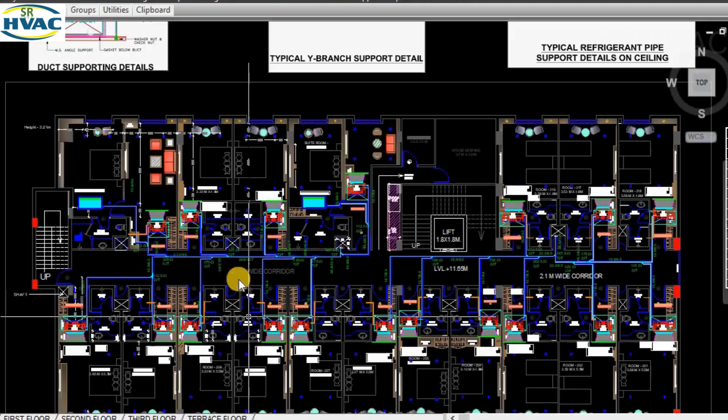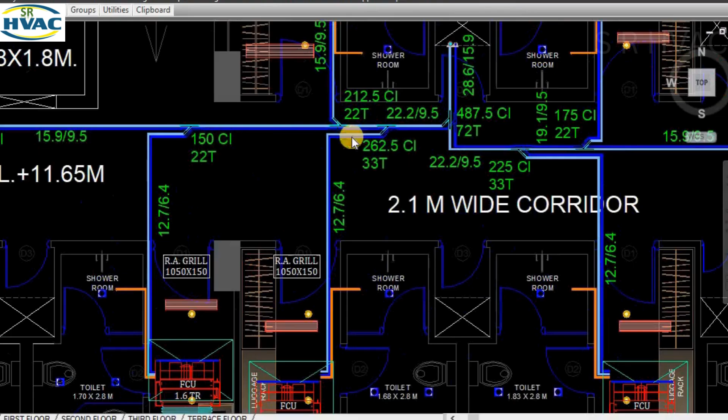In today's video, we are going to see how to read the VRV system drawing, or the basic VRV drawing, taking the complex engineering concept into a simple, easy to follow lesson. We will walk you through the piping layout, indoor units, outdoor units, wiring, and also the VRV schematic diagram of the VRV system for a hotel.

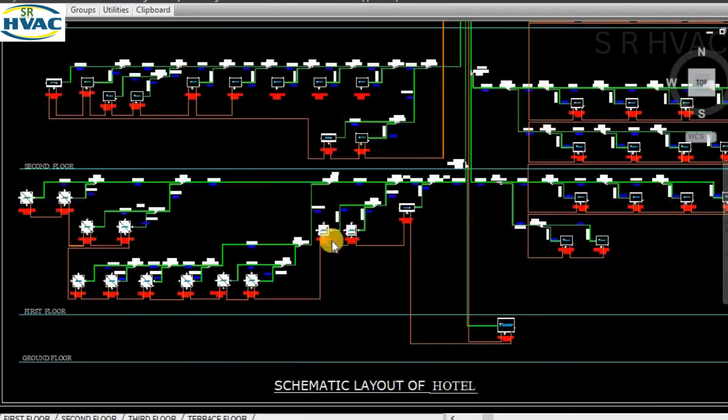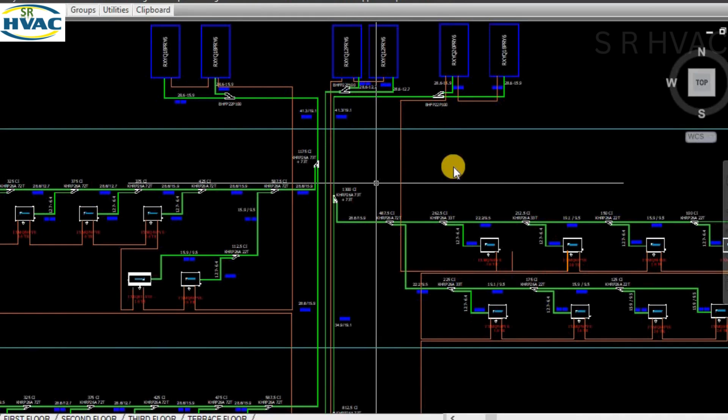So friends, let's start our today's topic, how to read the VRV drawing or how to read the VRV system drawing. First, before starting this one, we should know what is VRV. VRV stands for Variable Refrigerant Volume. It is a type of HVAC system that uses the refrigerant as a flow for cooling and heating medium. It is similar to VRF flow and often the terms are used interchangeably depending on the brand.

The VRV is being patented by the Daikin company. The rest of all are using the VRF brand.

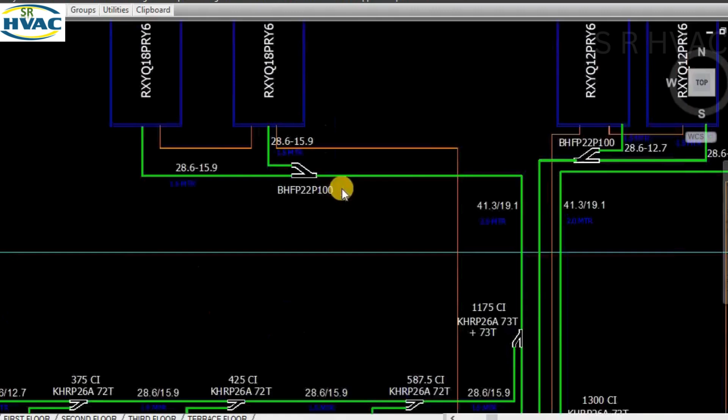Friends, in a typical VRV system, there are mainly four components. There will be an indoor unit, there will be a refrigerant pipe, and we have a Y joint which connects the pipe and the wiring and connection system between each indoor and outdoor unit. These are the four main components of a VRV system.

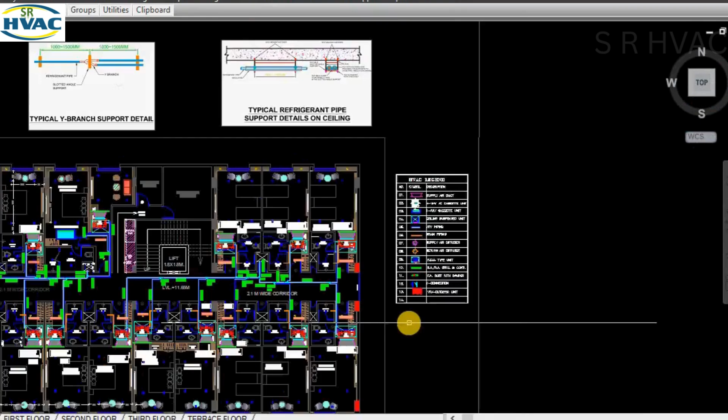So friends, let's start our today's topic, how to read the VRV drawing. When we receive a drawing from a consultant or an owner or an architect, we should first read what are the main legends it has, because all the main components are given in the HVAC legend.

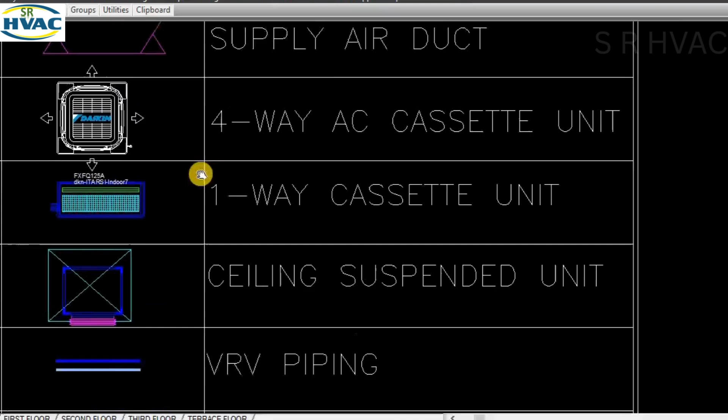You can see number 1 is supply air duct, denoted with this symbol. You have a 4-way cassette unit of Daikin, and this is the 1-way cassette unit of Daikin. This is the 4-way, this is the 1-way. Then this is the ceiling suspended unit, and this is the ductable unit.

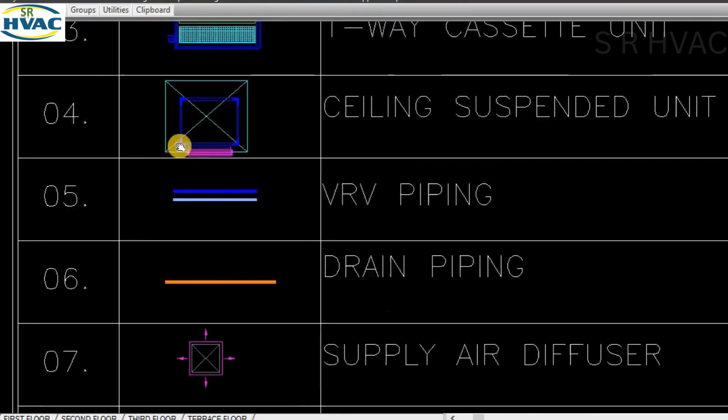This is the symbol for our VRV pipe. One is our gas pipe and another one is our liquid pipe. The next one is our drain pipe, denoted by this.

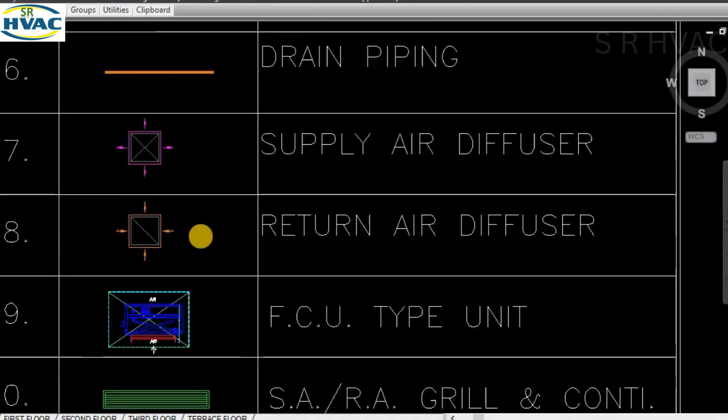Then if we have a supply air diffuser, you can see it is crossed, shown as a single line. This is the return air diffuser. The next one is fan coil unit. The next one is supply and return air, denoted by this symbol. And next one is fresh air duct with damper, denoted by this.

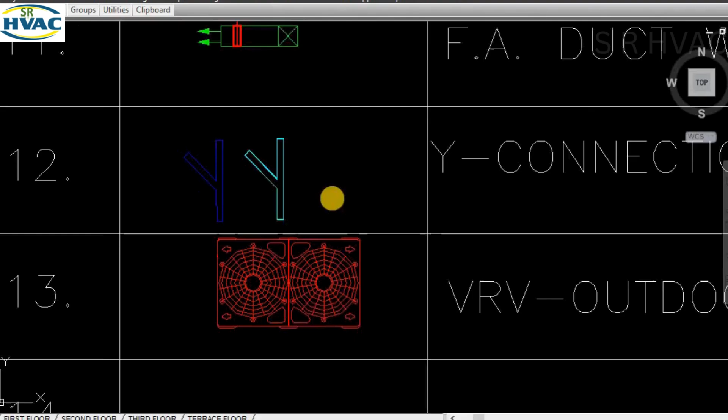We have the next one, Y connection, you can say Y joint. The Y joints, one is for liquid, another one is gas. And the last one is VRV outdoor unit, denoted by this one. You can see in the drawing, on the terrace, this is the outdoor unit.

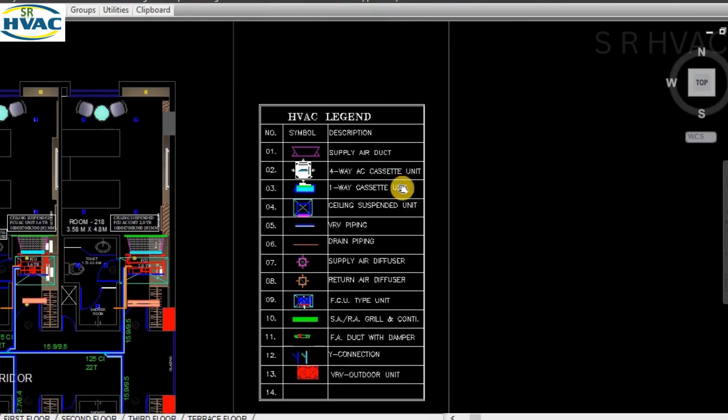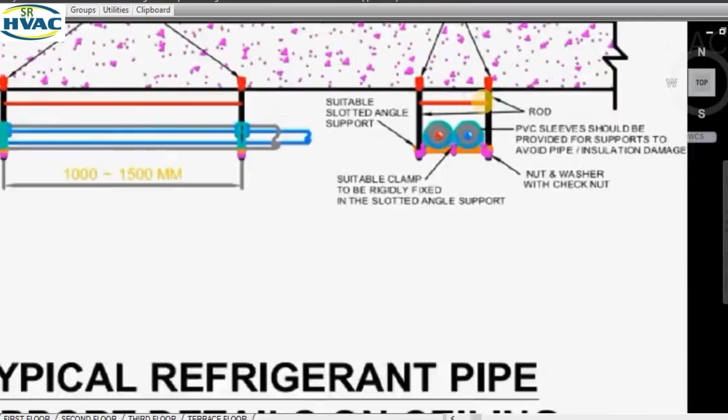So I hope you understand VRV and how important it is. First here you have to check what items are given in the legend. The other thing is typical, how the pipe will be connected and the supporting angle, and how the anchor fastener is being put and grounded.

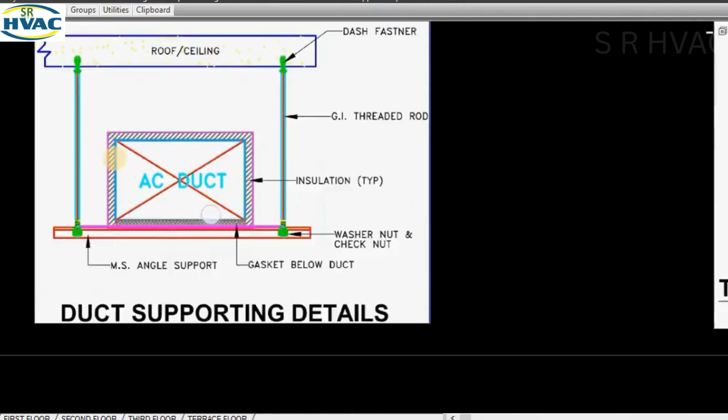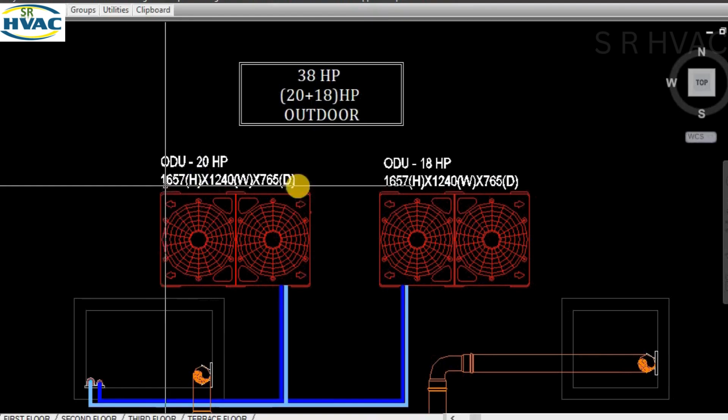Now we will start from the top terrace level where the outdoor unit is situated. So you can see here the first one is 38 HP, one is 20 HP, another is 18 HP outdoor unit. The dimension is shown.

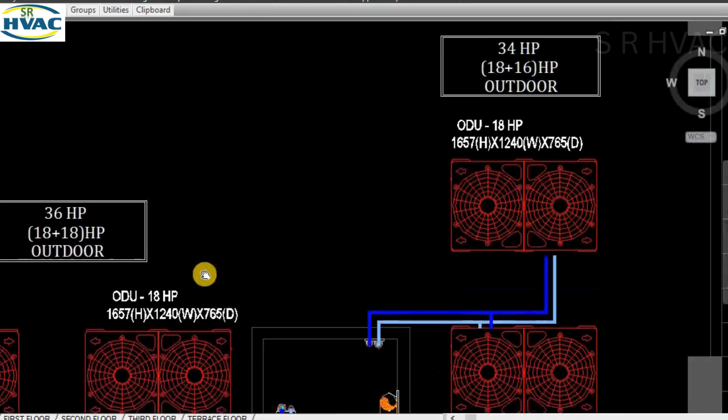One system is 38, another one is 34, 18 plus 16. The other one is 36, 18 plus 18. So means total there are 6 outdoor units, and there are 3 systems: 38, 34 and 36. This is all on the terrace floor.

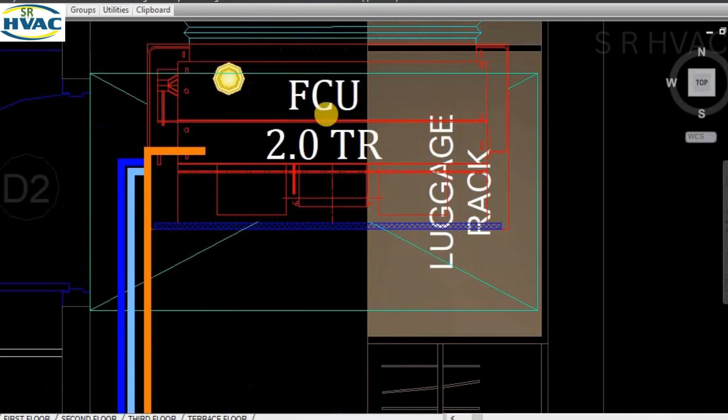From where will you get the dimension of this one? Okay, we will go to the catalog for Daikin. You can see this is the ceiling suspended unit. So there is 2 TR. 2 TR means 63, the capacity is 60. You can see FXMQ 63 PVE.

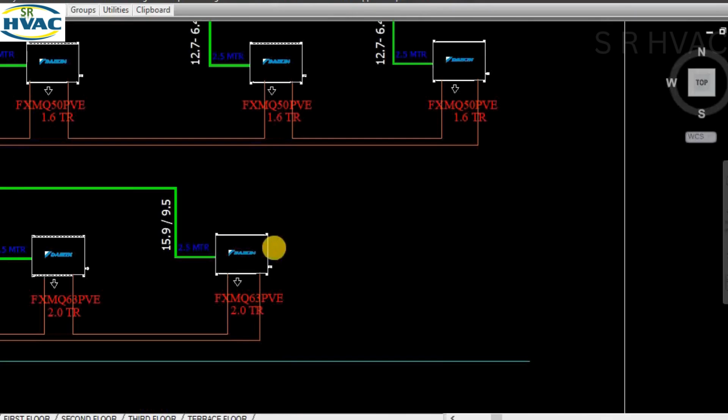You will see in the third floor the schematic. You can see this is the FXMQ 63 PVE, 2 TR. The capacity index will be 62.5. The piping will be 15.9 and 9.5.

You can see from the catalog also. From here also you can see this. You can see 9.5 and 15.9 is the pipe size.

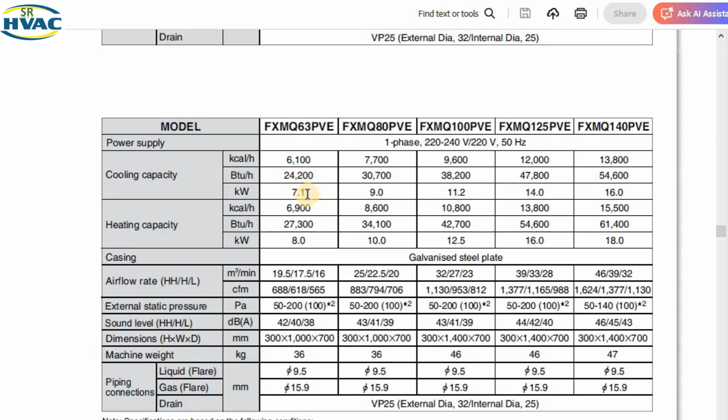How much kW is it? It's 7.1, and BTU is 24,200. If you divide by 12,000 you will get the TR 2. If you divide by 3.51 you will get the TR. This is detailed from the Daikin catalog.

Okay, we have seen both, from the catalog as well as the pipe sizing chart for 2 TR, 15.9, 9.5. I hope you are clear up to this one.

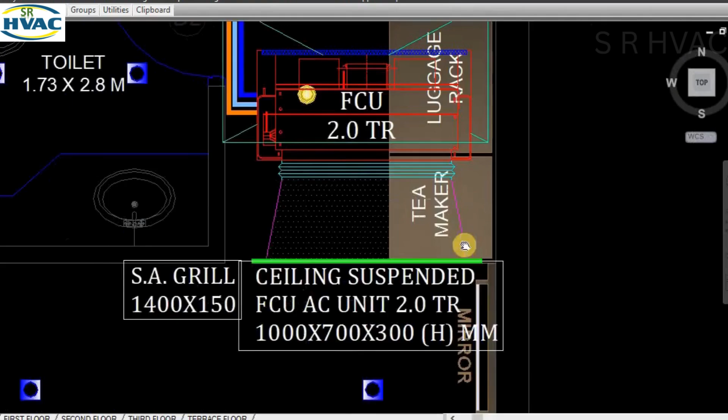Okay, this is the 2 FCU. We have FCU connected to the canvas. There is a small thing, a supply grill. You can see the supply grill is 1400 into 150. This is a 6-inch grill.

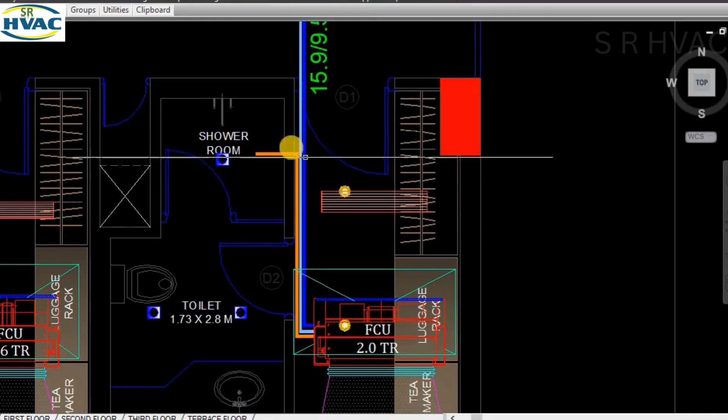There will be a return air grill. This is the return air. The drain will be going to this shower, the drain pipe. This is the first layout for these 2 rooms.

Then next you will get the Y joint 125. How will you get 125? It is 62.5 and 62.5. This total is 125, and the T is 22T.

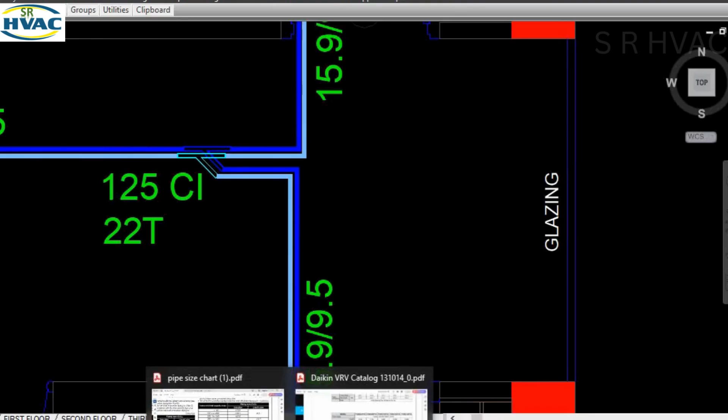You will see how 22T. You can see below 200 capacity index is 125. So we are getting 22T from this chart. So you get a 22T. There is a 125 capacity index adding both the units.

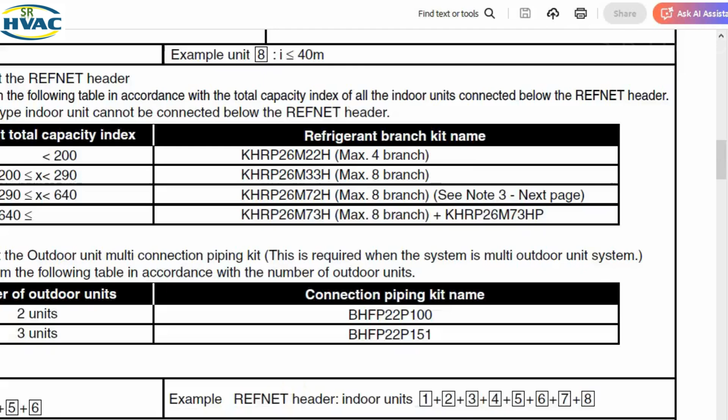And the pipe size is 15.9 and 9.5. From where do we get this? We will see again the chart. This is 100 to below 200.

Now it is 125, now it is below 150. So it will be 15.9 and 9.5. So for 125 it is 15.9 and 9.5. Similarly, this 125 we have to add, we will get 150.

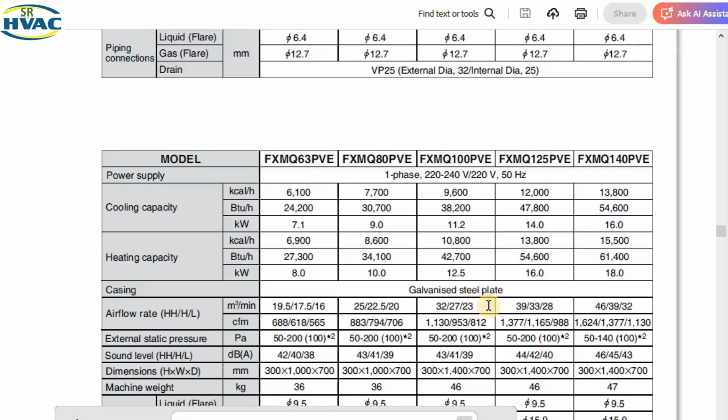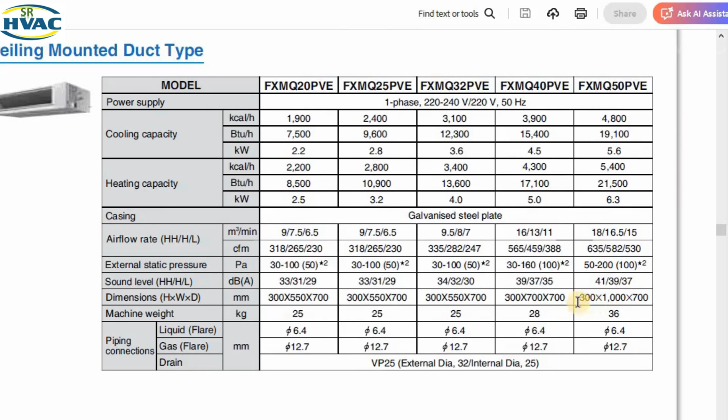CFM is 635. Pipe size is 6.4 and 12.7. You can say half. I hope you understand up to this one.

One more piping for this system, it is going from this room. This is also 1.6. You can see this is 12.7 and 6.4, the liquid and the gas.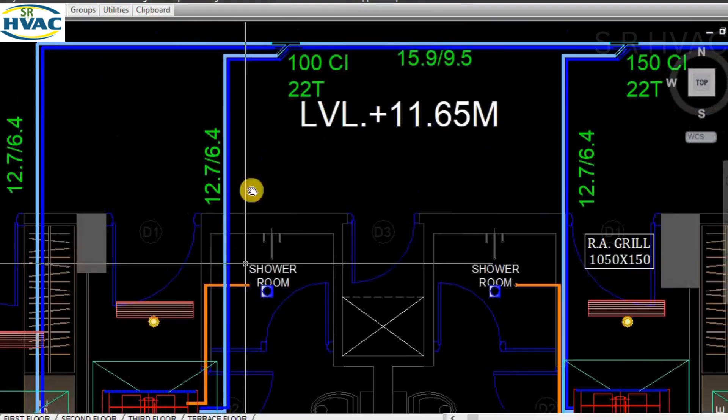This is also 1.6, so the total is 100 CI capacity index, and the T will be 22T. We have just seen how the T is coming. The pipe size will be 15.9, 9.5 because it is below 150.

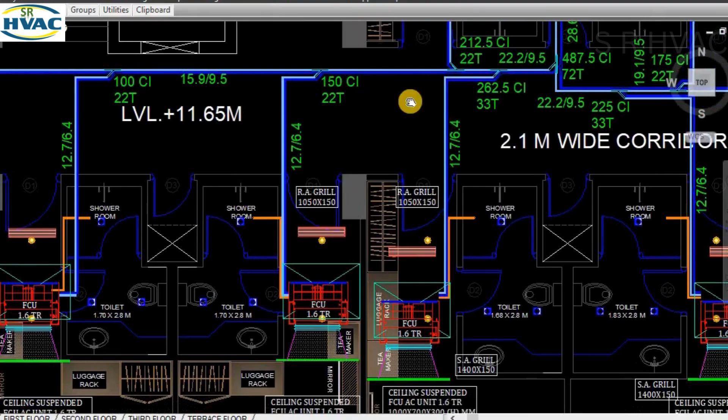The next one is 1.6. So similarly, for 150 the pipe size is also 15.9, 9.5, as you can see. So friends, for this particular area in the third floor, this zone you can say

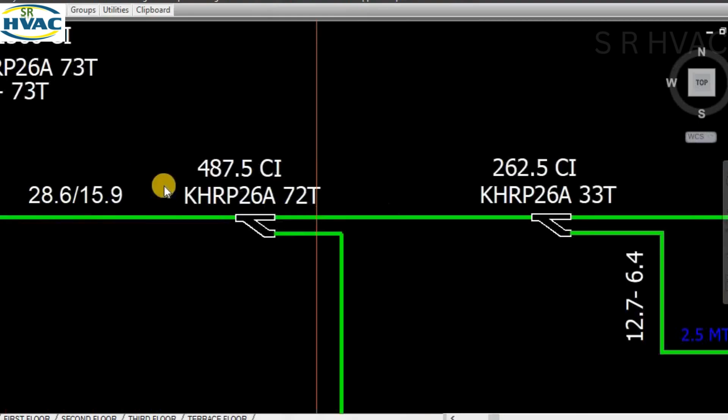These are the 1, 2, 3, 4, 5, 6, 7, 8 machines there. You can recheck with the CI value of each one from this schematic drawing to your shop drawing area. So this area for the third floor, it is clear.

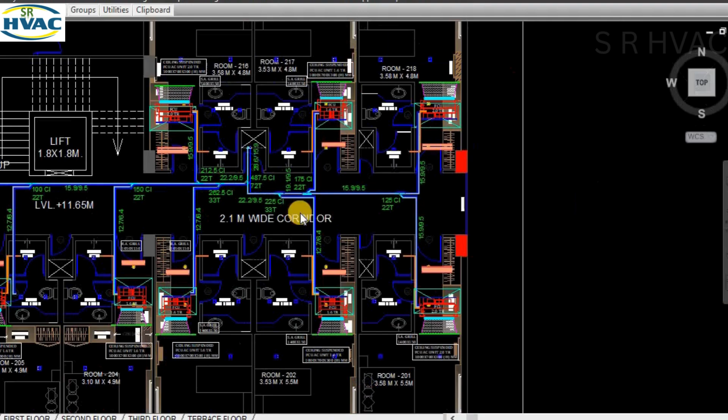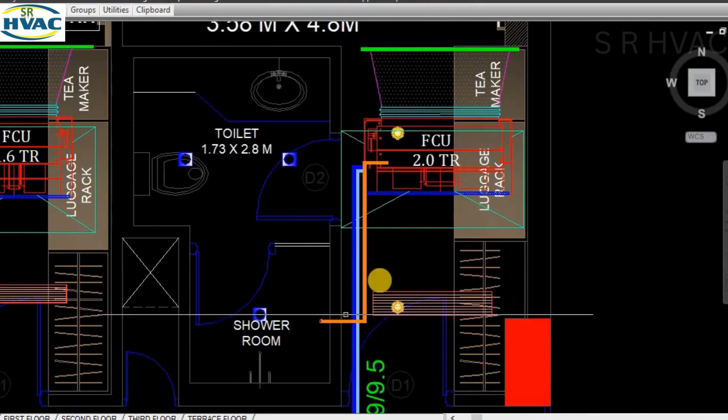Now we move to the second floor. This is your typical name. 1, 2, 3, 4, 5. 1, 2, 3, 4, 5, 6, 7, 8, 9. Total 9 machines there, and similarly 487.5. But we have seen in the third floor the similar machines are there. Same 2TR FCU, the drain will come to this area, and we have a supply air grill. There will be a return air.

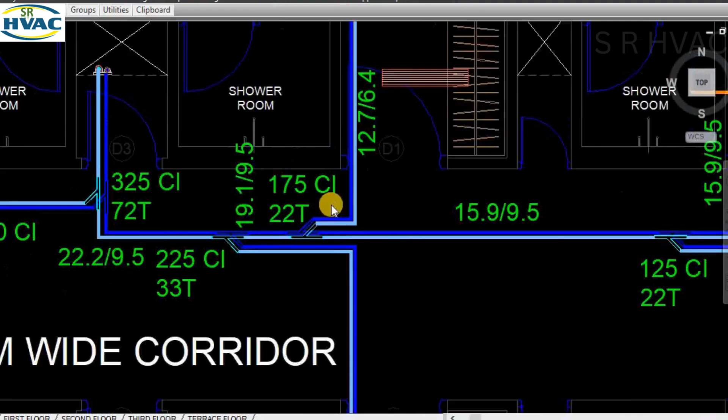I hope you understand this one. Okay, then we are going to the first floor, and it is 325, the total one. How do we receive this total? By 100, 175 plus 50 is 225. 225 plus 100 equals 325.

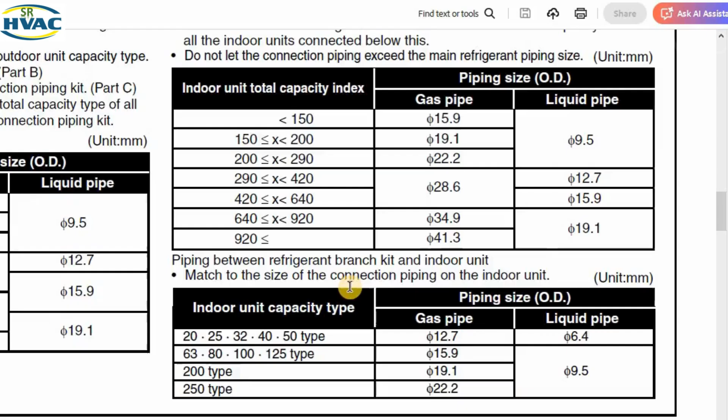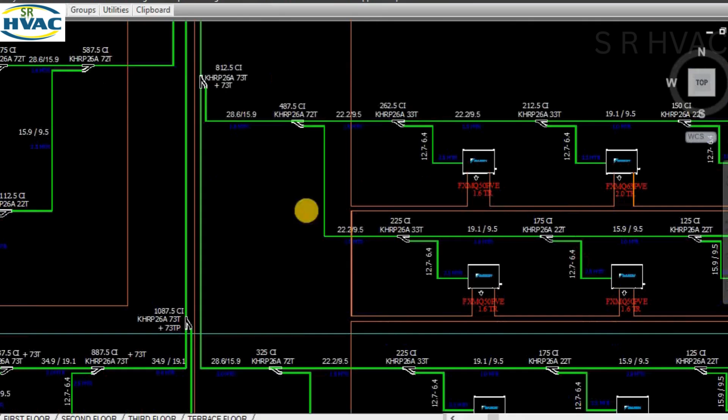For this circuit there will be 487. The last floor is 325. We are adding this one. So friend, I hope you are clear up to this one.

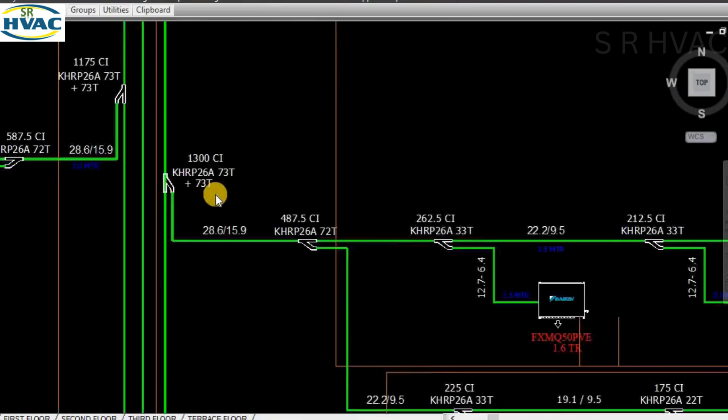325 plus 487 gets us 812. For this one we have 38 HP. I hope you are clear about this zone.

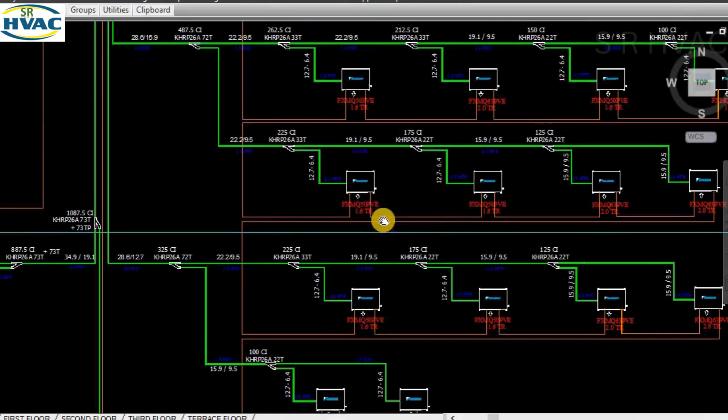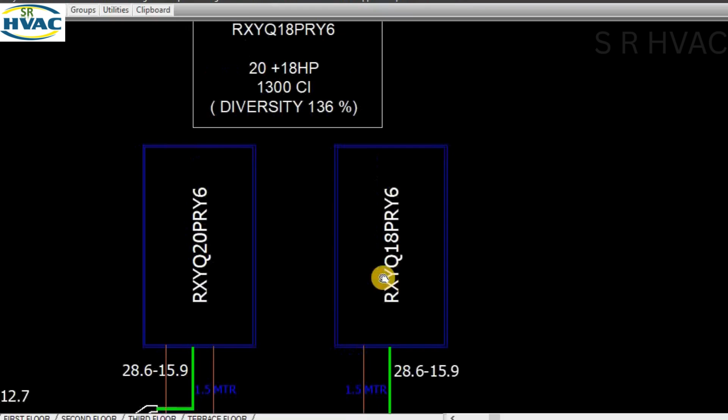One more thing I forgot to tell you. This is the looping for wiring for communication between the indoor and outdoor unit. This is the loop, the wire is 1 square mm. This is going to the outdoor unit for communication. And for the outdoor electric connection, we are using 10 square mm for 18 as well as 20 HP outdoor.

So friend, this side is clear, this section we have seen. Now this will be similar. This section we are taking 36.

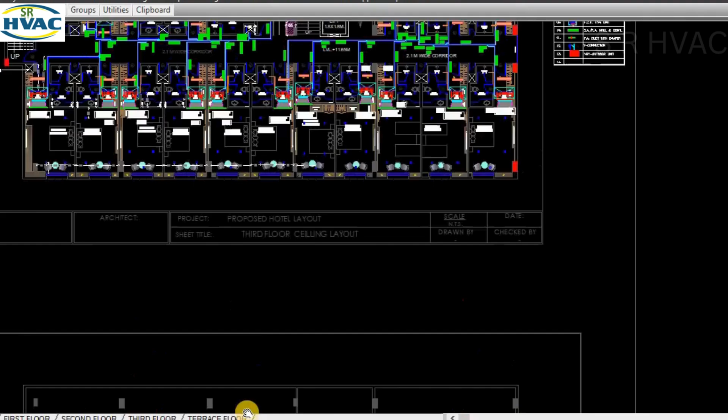This one is going to the FCU. This is the different one-way cassette unit. This is the one-way cassette unit of Daikin, which we have seen in the legend also, the one-way cassette.

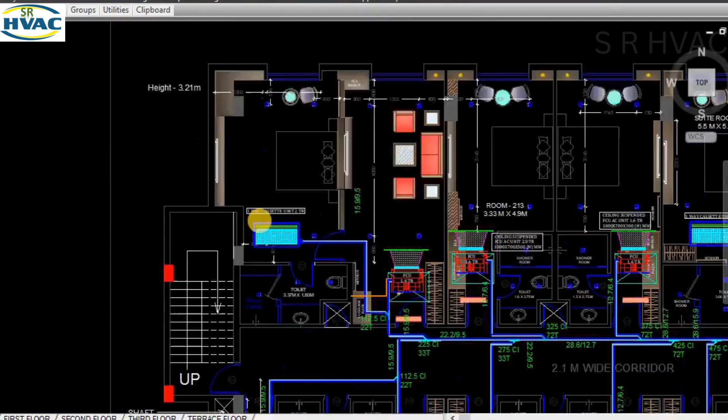There are two one-way cassette units, so two cassette units are in this circuit. Rest are all similar units, 1.6, 1.6, same 1400 into 6 inches, 150 mm supply grill. The return there will be 1.6, the last one.

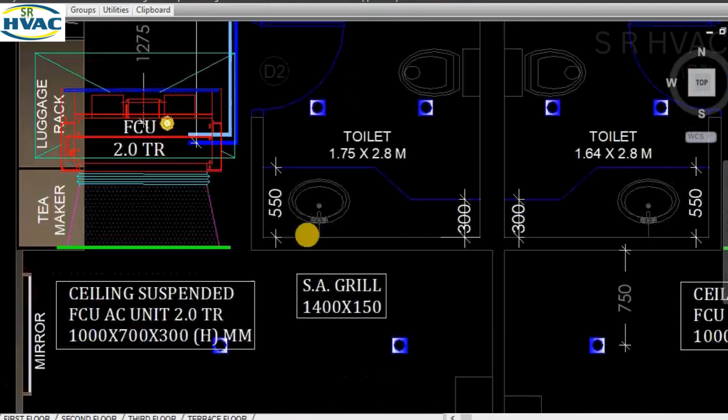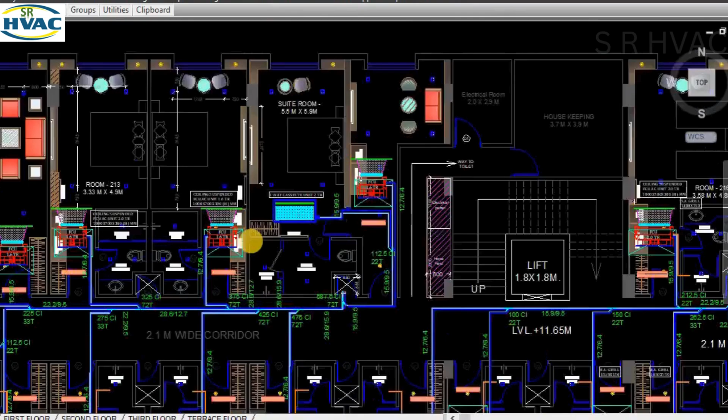So we check here. Okay, this is our one-way cassette in this. So friend, I hope you are clear about the piping and indoor unit, how to read the piping, as well as indoor unit, how to calculate the CI value, and how to find the branch.

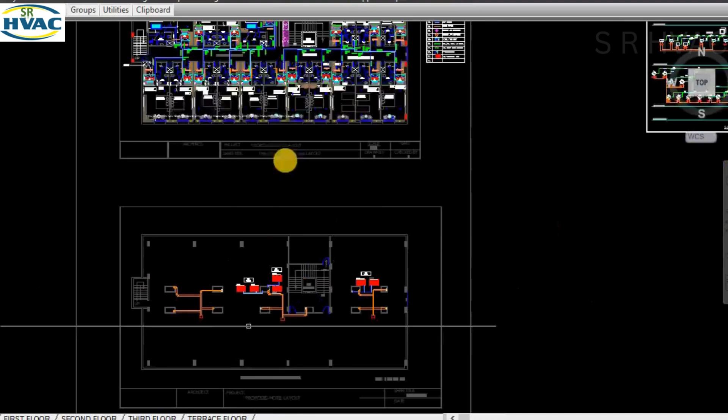For this one, this is similar. So we have seen this unit, and this unit. I hope this is clear. So in the restaurant, how much do they have? 2 TR into 6 units, cassette unit. They have cassette, this is the 3 by 3, 950 by 950 cassette. They have 2 TR. From where do we find this in the catalog?

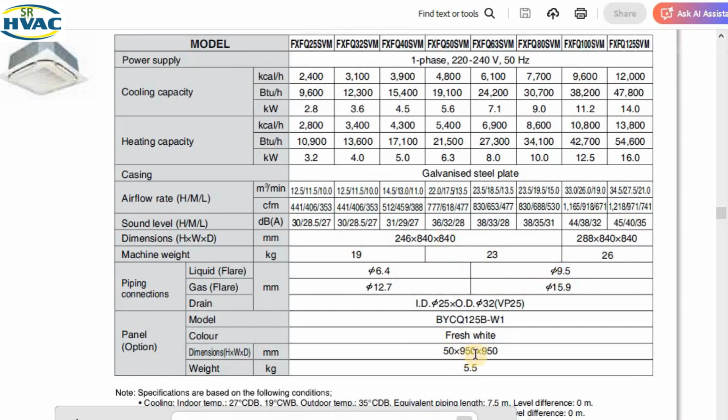So friend, this is the catalog for Daikin. We are using 2 TR, FXFQ63. This is the 2 TR unit. These are all the dimensions. Piping is 9.5, this is 15 and 15. This is the panel. This is the catalog for this unit, you can see 15.9, 9.5 for the 2.

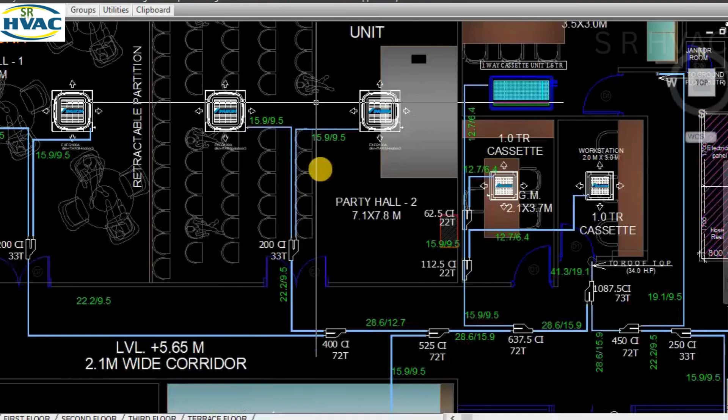Y joint here, they are connected. Here also we are using one-way cassette, and in this party hall we are using 3.3 TR. So let's see the spec for this one also.

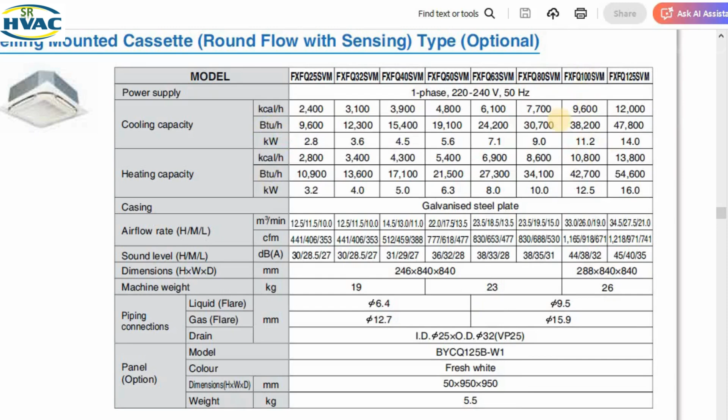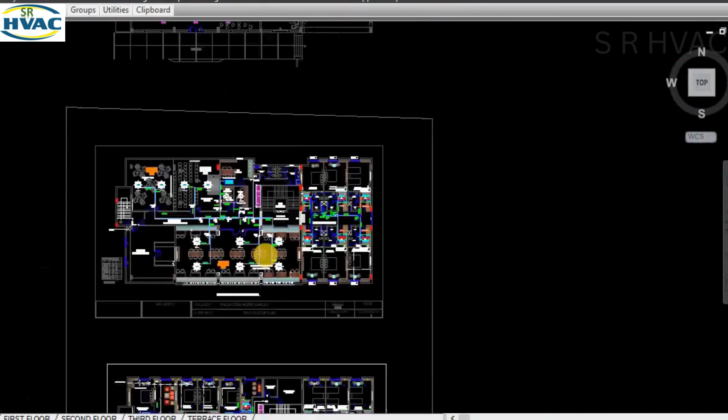We also see in the schematic, you can see there are 2, 3, 4, 5, 6. And the other circuit is this, 100, 3.3 TR. This is 1, 2, 3. We are getting 1, 2, 3.

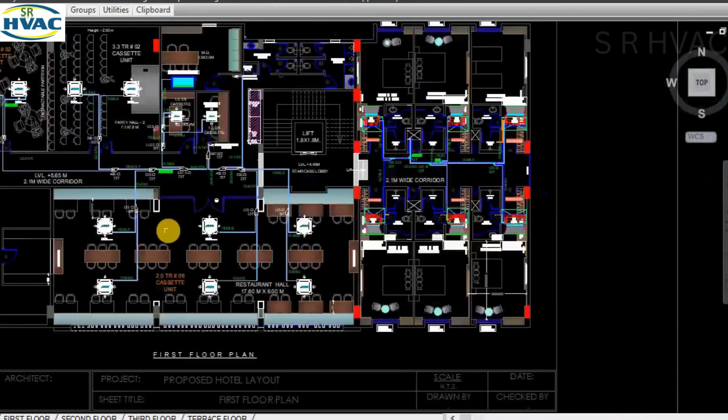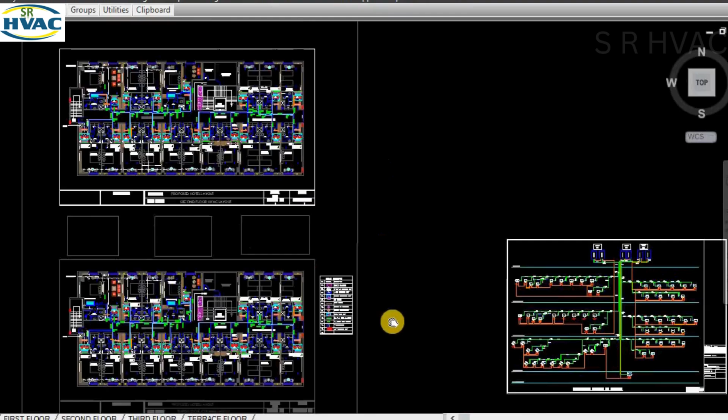We calculate all the CI, you get this. And this is going 16 plus 18, that's the diversity. And this is the piping as well as outdoor unit.

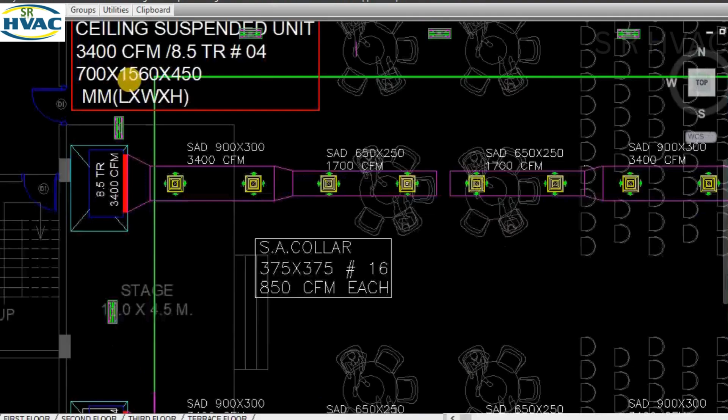This is the indoor units that are being used in the VRV system. In the ground floor, they are not using VRV, they are using the HVAC. They are using 4, 8.5 unit of ductable, you can see 1, 2, 3, 4, and the CFM is 3400. There is no connection of VRV, so we are taking this one. So friends, this is all about our VRV system drawing.

How to read the VRV system drawing or VRV drawing.